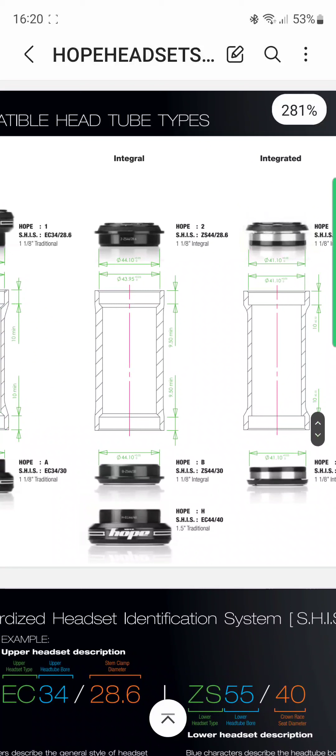This is a video talking about how to go from 1/1/8 into tapered, onto a bike that uses normal straight steerer tubes. Now, at the moment, it's very hard to get the forks that you need for your bike.

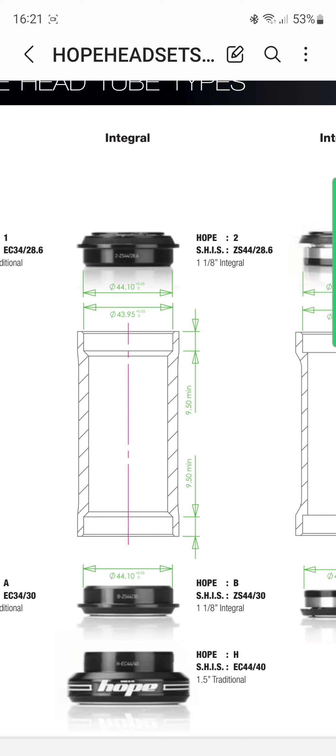It's not easy buying yourself the RockShox Recon Silver TK, what's the turnkey, or if you're going for the Recon Silver RL, it's not easy to find at the moment because of how hard certain things are to get hold of.

Now, if you're someone who really needs to get forks onto your bike, the best method is for people that use this integral headset. That means semi-integrated. ZS means zero stack. So this is the zero stack 44 headset, 1/1/8 at the top, 1/1/8 at the bottom.

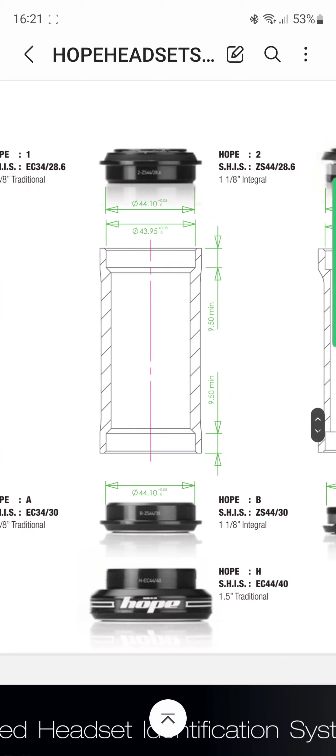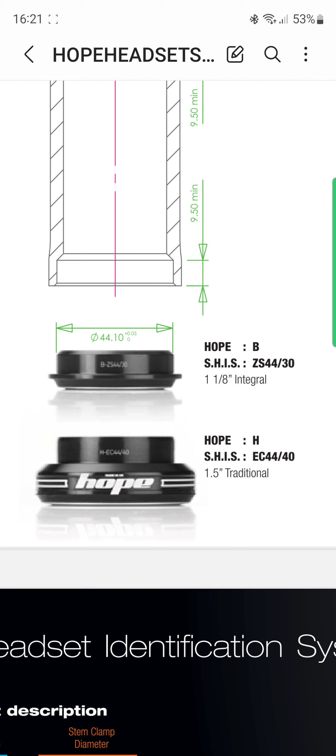However, if you take a look down here, you have the headset, not the one that says B on it, which is your ZS44, but the one that says H. This is the EC44/40 1.5 traditional headset.

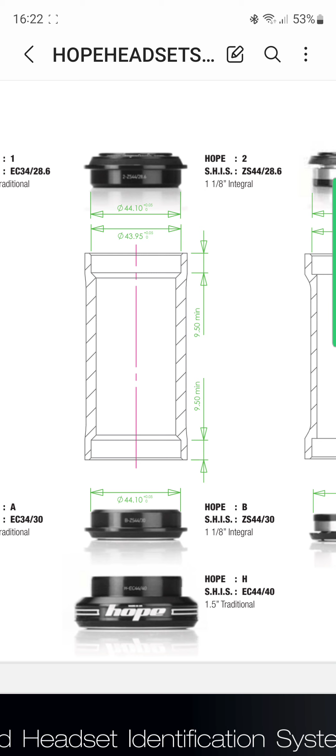So you can turn your mountain bike - let's say you've got something like a 2021 Specialized Rockhopper Sport, that's what I'm riding at the moment. It uses zero stack 44 top and bottom.

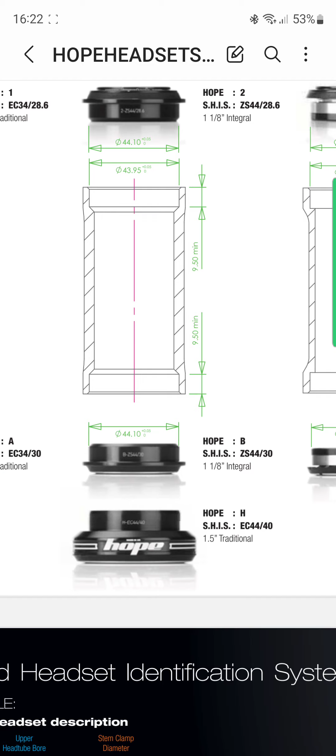However, companies have made these bottom headset cups where you can actually go tapered headset, to give you access to all the forks that you need on the market.

Now, some people are probably thinking, I can't get any forks, what should I do? Should I pay over £1,000 upwards and get myself a bike that uses a tapered headset, so at least my new bike's got 1/1/8 at the top and 1.5 at the bottom, as you can see?

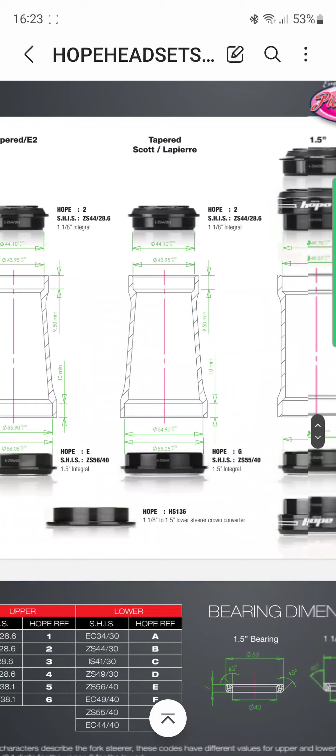But the thing is, you don't need to do that. All you need is to buy the EC44 and you're good.

But the thing is, am I really going to buy Suntour forks? I really have Suntour on my bike and they're not really great, so I want to replace them for RockShox, that I always like.

I just like the way you've got the aluminium steerer tube. Some people may say the word aluminum. I just like the way the forks are - easy to turn around the corner. You don't feel the extra weight that you're throwing around. You get this nice, light, playful feeling that I've always loved about my Solo Air forks.

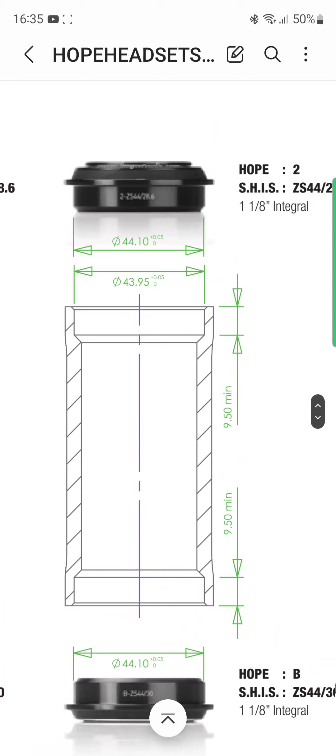Hope made sure when they designed their one, it will sit in your frame nicely without hanging out, and you're good to go. If I had to strongly recommend a headset, this is the one I'm 100% buying for myself.

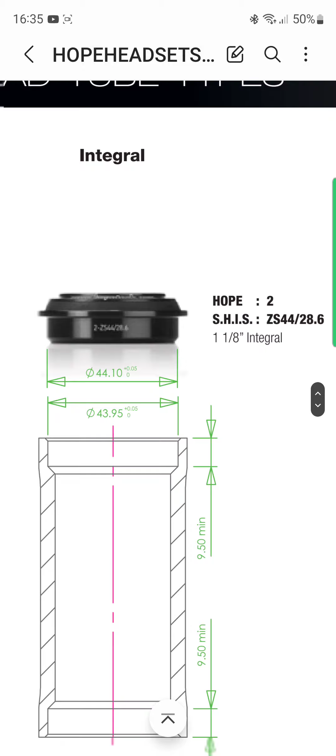I've ridden on Hope headsets before, never had any problems with them. They worked well, and they've always been brilliant for me. However, this is just one of the ones I would recommend, because with this headset, you can't really go wrong.

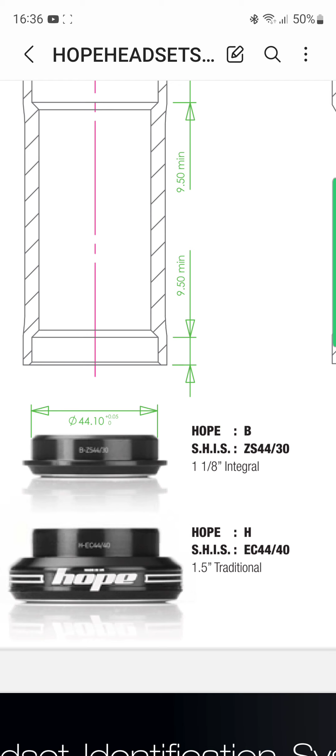It's ZS44 that goes at the top. You got the EC44/40 at the bottom. Once you go for these tapered headsets, you're good to go, and you can run any fork you need to run. You don't have to worry about only having ZS44 top and bottom 1 1/8, and not being able to find Recons or Judys or Manitou Markhors or Fox 32 Floats. Once you go for this one here, EC44, every fork you want to run, you can run it on your bike.

And you can choose if you want to run 15mm axle with a width of 110mm or a width of 100mm. So you have the option.

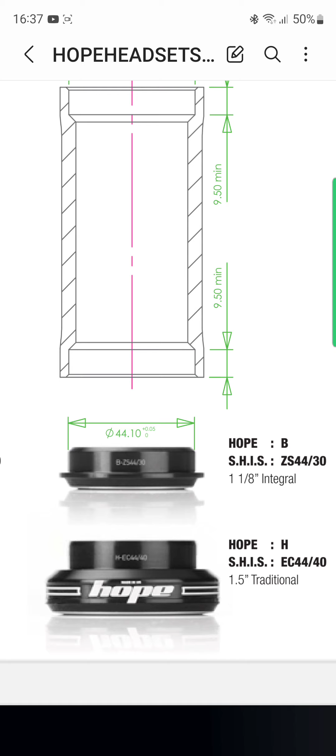Of course, when you go for the boost forks, those are the forks that are going to hold tires up to 2.8, around there. I think 3.0, but I'm very certain most of the forks are definitely 2.8-inch tires if you're going to run.

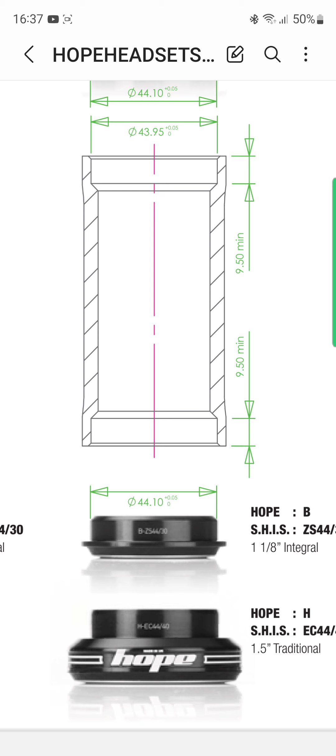However, this is going to be going on bikes that's going to have 135 millimeter axle width at the back. And with most of these bikes, they're going to be running tires, if you're going for like 27.5 or 29. There's no point buying yourself a 26 bike at the moment, because if you're looking for wheels, you have to be 27.5 and 29. If you end up buying any bike that has 26, then the only company I would recommend going towards that will have you covered would be Hope Tech.

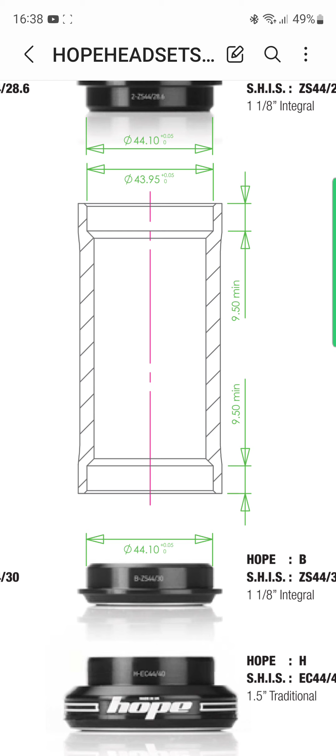I think Halo Wheels will have you covered in that. Nukeproof Neutron and Horizon will have you covered on that. However, if you're going 26, you're really going to limit yourself. It's bad enough being 135, but it's even worse to have 26.

Because you're running 135 on my bike, it tells me that the maximum tire I can put is definitely 29x2.3s. But when I bought the bike from them, they had it shipped with 2.35s. And if I look at my clearance, you can see the reason why, because these 135s, the ones I have, there's not enough space on some of them to put like 2.5s.

2.4, I say you could get away with. But because I run 2.35s, I'm not going to be running a 2.8 at the front with 2.35 at the back. I'm always going to run the same at the front and back.

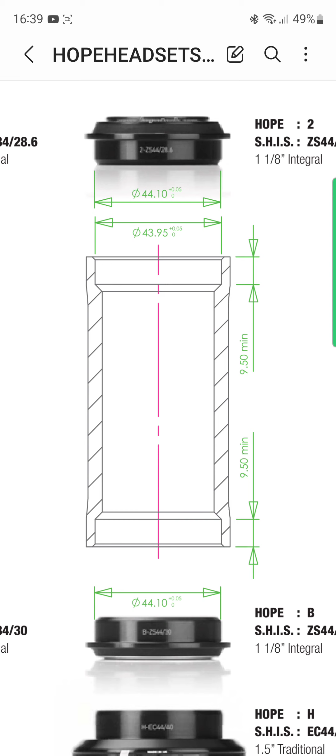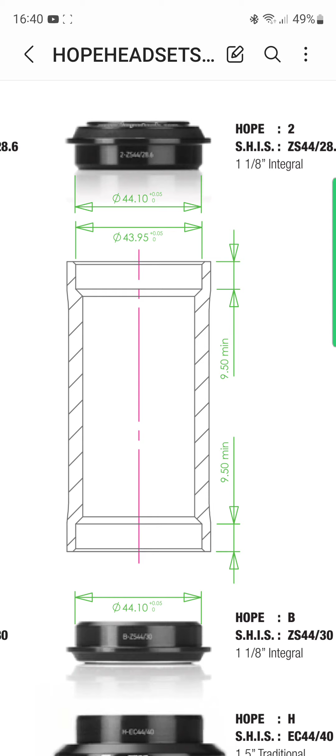So this is a video talking about if you need forks and you don't want to be waiting around on these 1 1/8 forks to come back into stock. It could be 2023, could be 2024, who knows. It's going to be a long wait. But if you really need forks for your bike, then I strongly recommend you're going to have to purchase yourself.

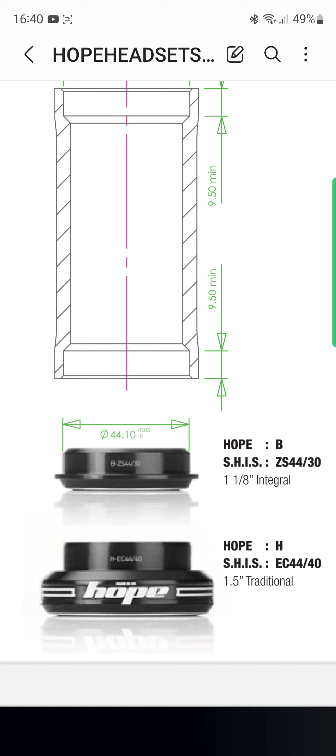This is their pick and mix. So you want to pick the EC44/40 at the bottom, ZS44 at the top. And if you do that, as you can see for yourself, a lot of these forks you'll be able to run. As you can see, I'll go slowly.

Suntour Axon RL RF forks, RockShox XC30TK coil, Suntour Axon RL R air forks, Suntour Axon 34 air forks.

So the only reason why I spoke about the RockShox coils is I used to have coil forks and suspension, air forks, and so I know. Same with Manitou, I only rode the coil ones, but I never touched the air spring ones.